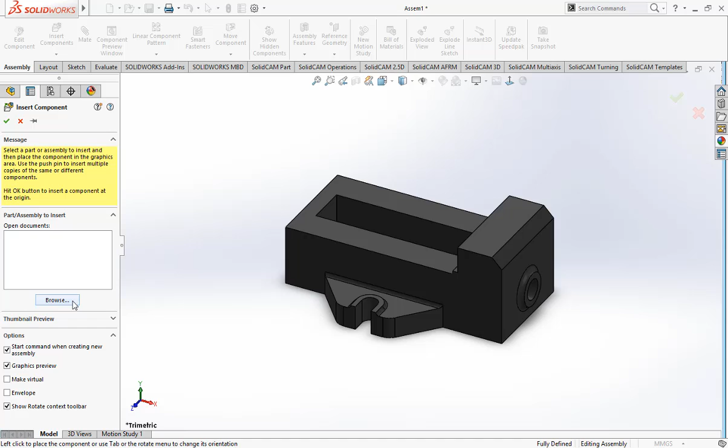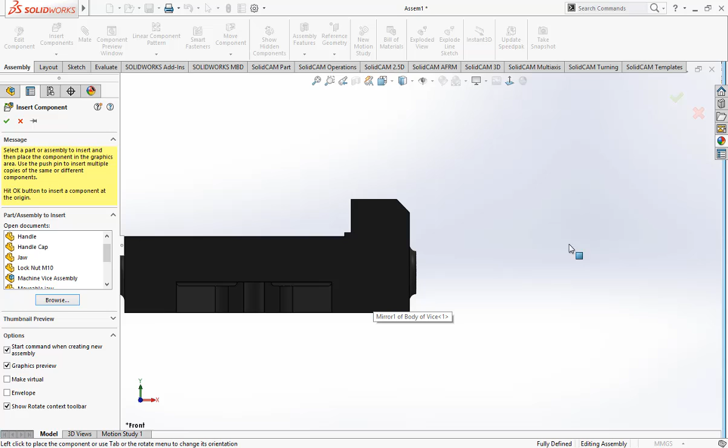Now it is time to import all the files once again, one by one. Sorry, this is the previously used assembly, I need to fix that thing. Okay, just put here.

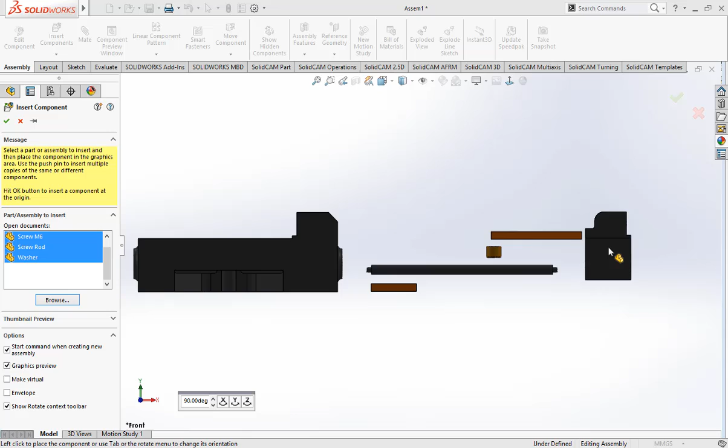Click on first and the last, just leave the assembly as it is. Now place the part one by one so that it will be more easier for us to find out where exactly everything is. That's it, these are all the parts that we required for this assembly.

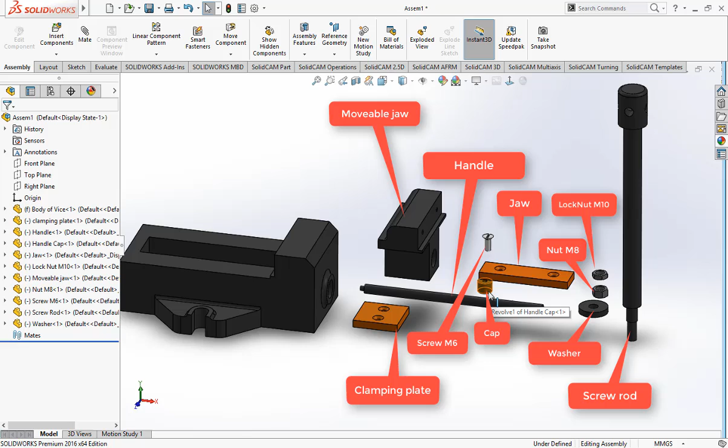As you can see, this is the movable jaw, and this is the handle which we're gonna use to rotate this screw rod. This is the jaw, and this part is called the clamping plate. This is washer, this is nut M8, and this is lock nut M10, and this is the screw M6, and this is the cap which is going to be fitted right at these parts.

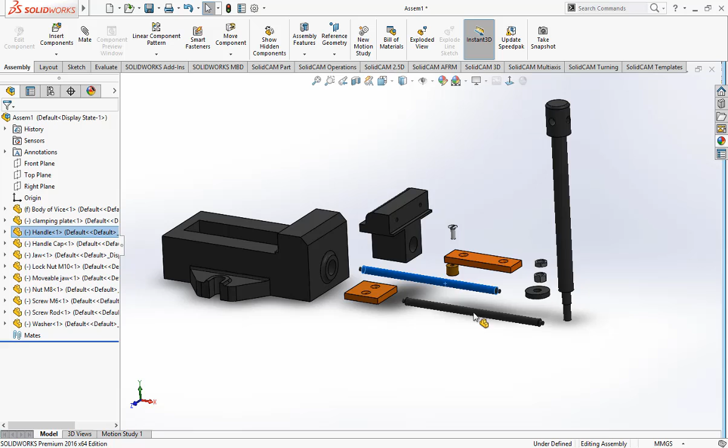First thing first, I'm going to double the amount of some parts, like this handle. I need these two because these are going to be fit in these two holes. So click control and left click and drag it over here. So now these are two parts.

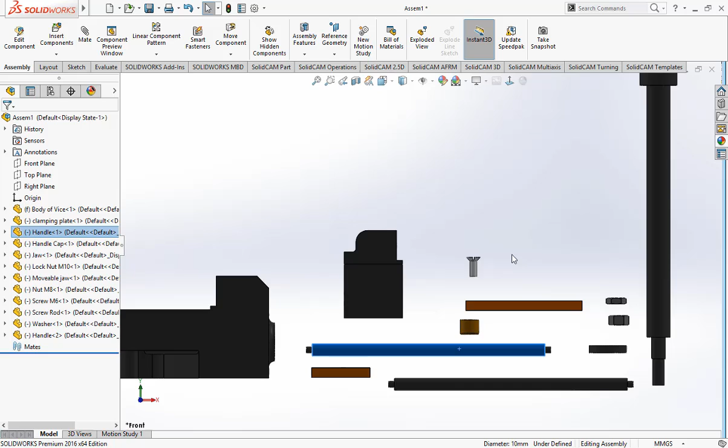Now we need screws, how many? 1, 2, 3, 4, 5, 6. Okay, so one is there, control and left click mouse and drag it. 2, 3, 4, 5, 6.

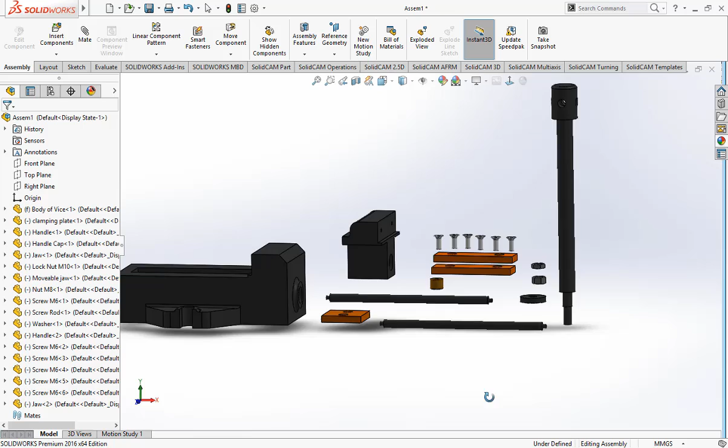So we have 6 screws, and this jaw we need 2 of them. This one is going to be fitted over here, and the other one is going to be fit over here. So again, control left click and drag it. That's it. So these are all the parts that we need to assemble the machine vise.

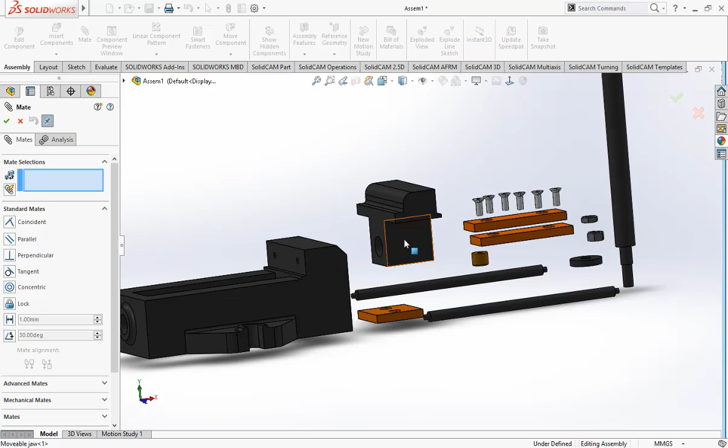For the first thing, we are going to click on the mate over here and click this surface and this surface and make it coincident, click OK. For another mate, click this bottom part and this upper surface and make it coincident, click OK.

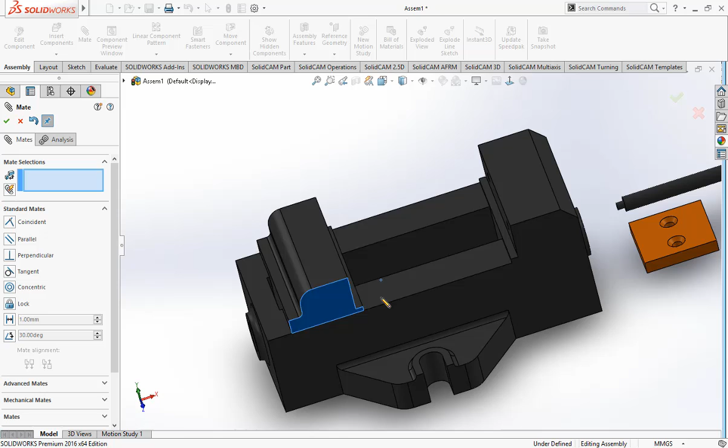Now as you can see, the part is sliding right through the main body. So for this purpose we are going to use the limit mate, so that this movable jaw just slides between this recession or cavity, whatever it is. It has to be moved from this point to this point, not like this. So we will do this.

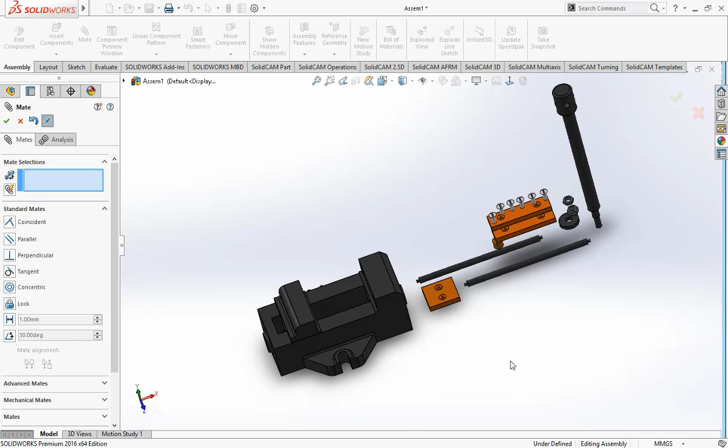Before doing the limit mate, what we're gonna do is I'm going to place this over here. How we're gonna do this? Select the bottom surface and this surface and make it coincident, click OK.

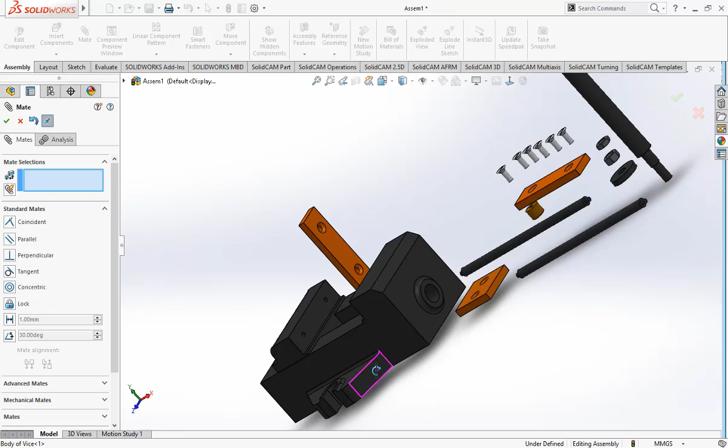As you can see here, the distance or these holes are not right through, not on the center of these 2 points, but offset from the center line. So this is not at equal distance from these 2 distances, so we have to check what goes where. Take the shortest length from the hole and mate it over here and coincident, click OK.

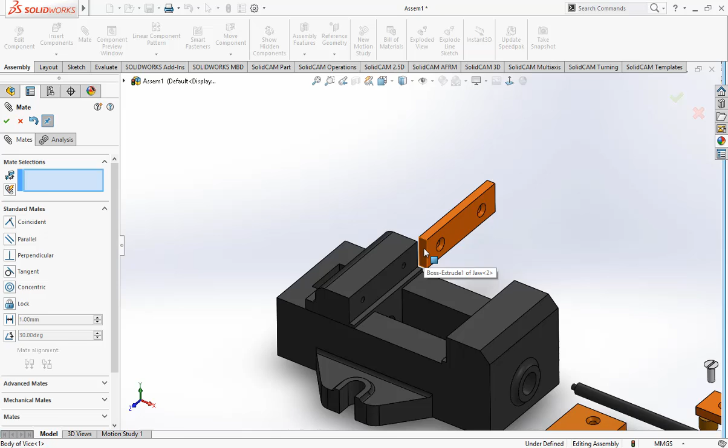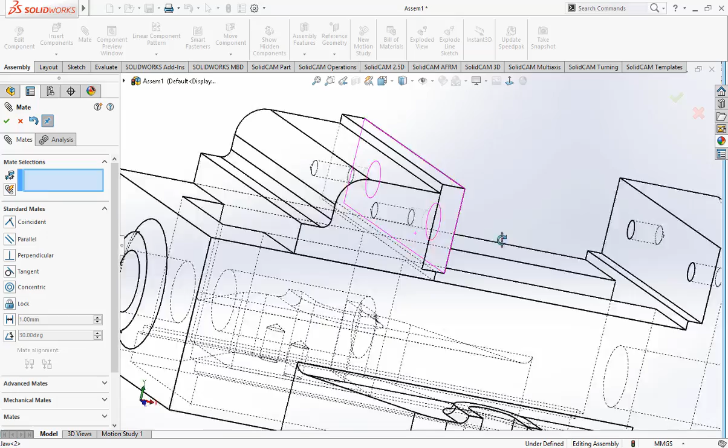Now this surface and this surface, coincident, click OK. Now as you can see, the holes are just concentric with this. Going to change the wireframe structure. As you can see, it is perfectly aligned with the hole. Going back to the solid.

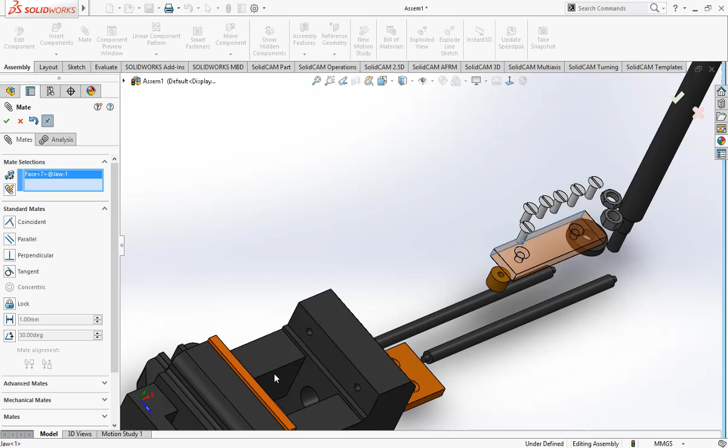So repeat the process, same at this point. Take the shorter distance, click over here, coincident and right. The back face and this, make it coincident and click right. Now this surface and this surface, make it coincident and make it right. So everything is perfect at this moment. Now this is also coincident with the hole.

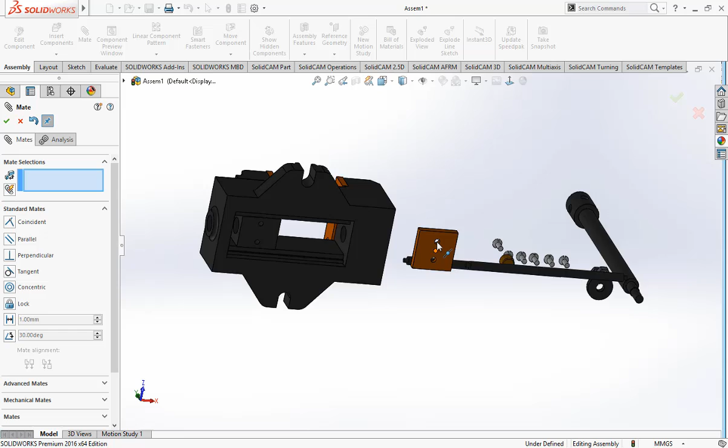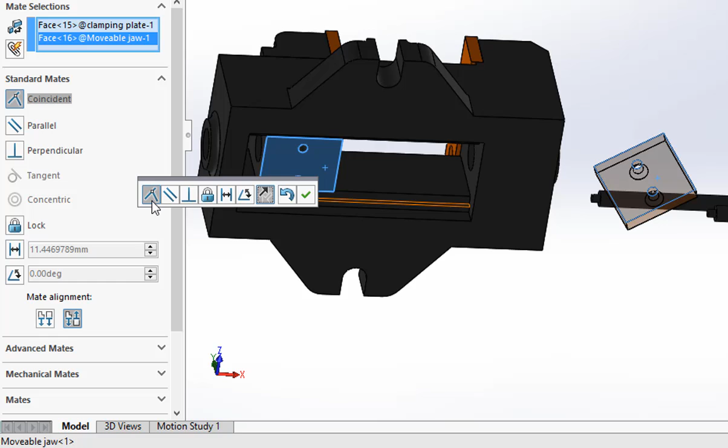Now make it parallel because it is at some angle. To make it parallel, click on this and this, make it coincident, it is already parallel, click OK. As you can see here, it is a bit off.

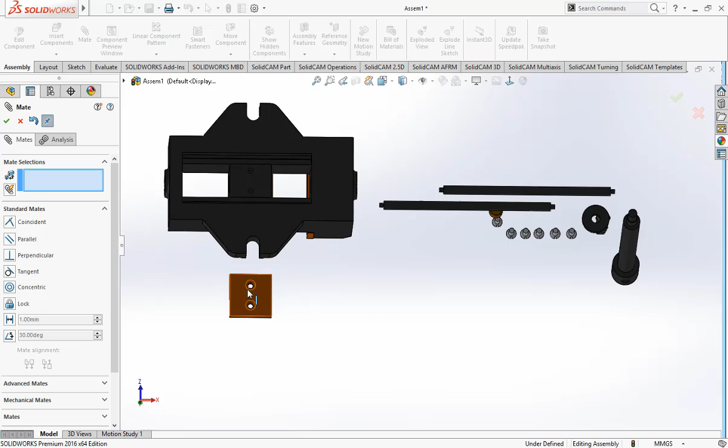Now as I drag over here, it is perfectly aligned with this edge and this edge, but not at the center of these holes. For this purpose, I'm going to make it concentric with the holes, something like this.

Now it is perfectly aligned, not going anywhere. Now it's time to fix with the help of screws.

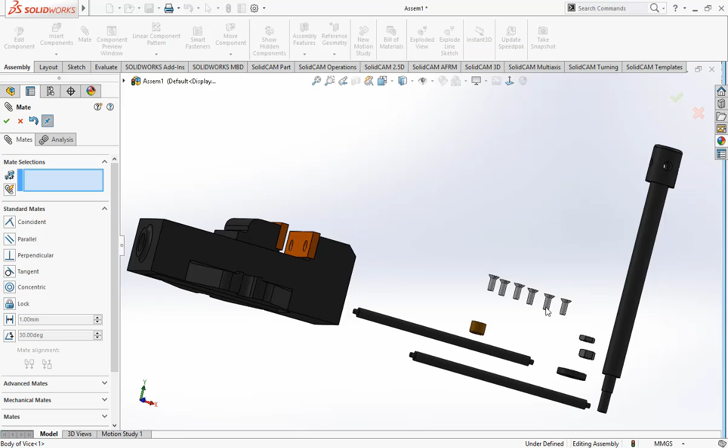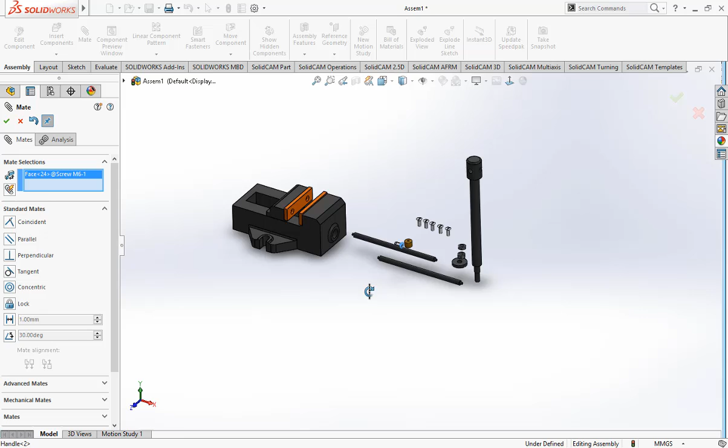Click the cylindrical part of the screw and this hole, make it concentric and click OK. Now it is aligned. Select the tapered or angled surface coincident with this angled surface. Make it coincident and you can see it is perfectly aligned at this surface.

Now repeat this process with all the 6 holes.

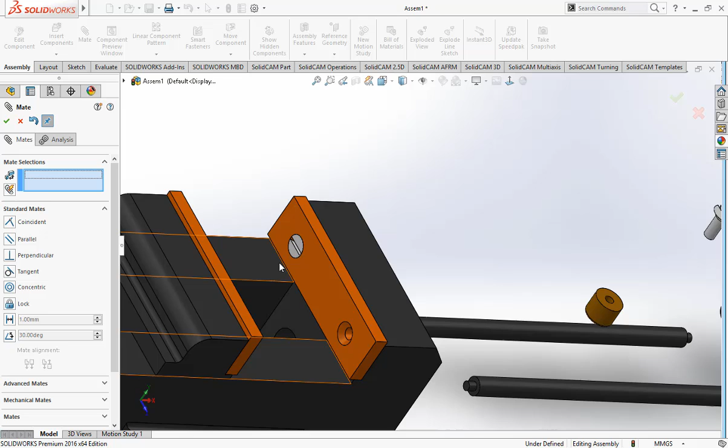This jaw part is fixed with this screw on the body and the sliding part. Now it is time to fix the bottom screws. Select the screws and repeat the process.

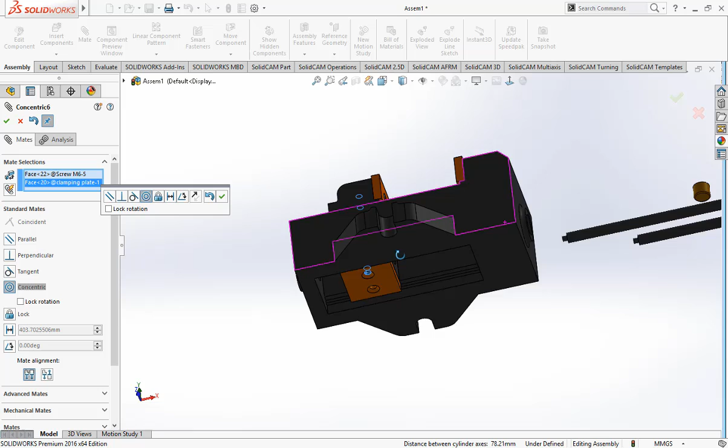As you can see here, the screw is in another direction instead of the downward direction. To make it align with this surface, click on Flip Mate Alignment. Now the screw is downward.

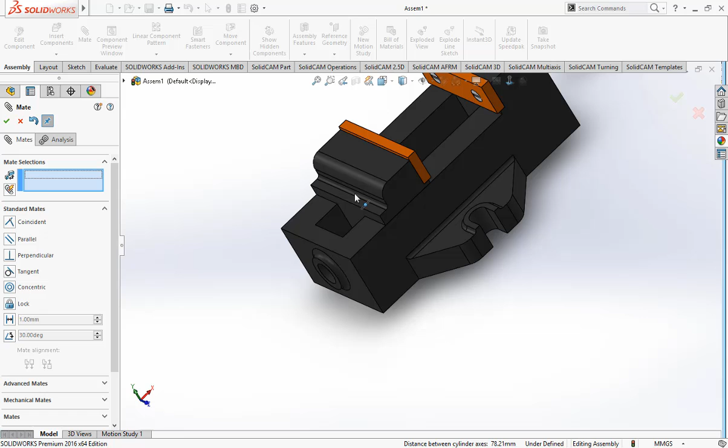As you can see, we are not able to see this part. It doesn't matter, it is there. It's not visible at that moment, but the screw is right inside of it.

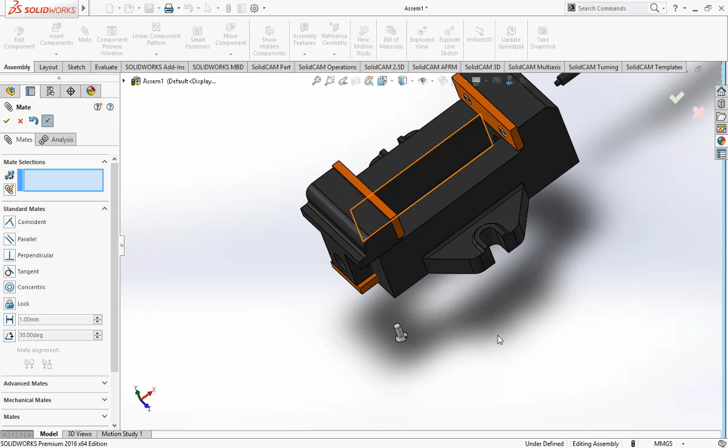Select that contour and align it with this surface. Done. Now for the last screw, drag it over here.

Select the cylindrical part and make it coincident with the surface, turn it upside down, select the tapered part and make it coincident with here.

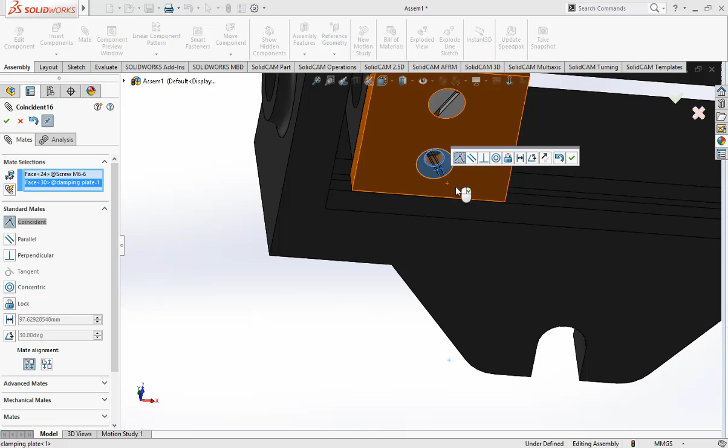So everything is at its place, not exactly, these are still outside of it. Now what we are going to do, it is still sliding through the body or penetrating through the body.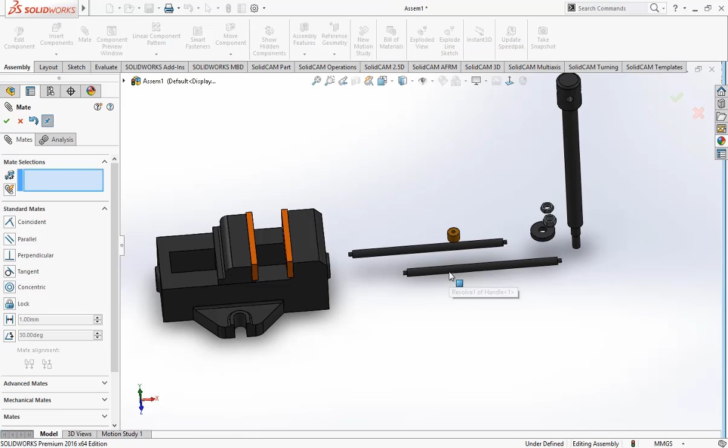Now it's time to align this and this, and click OK. Now the shaft is here.

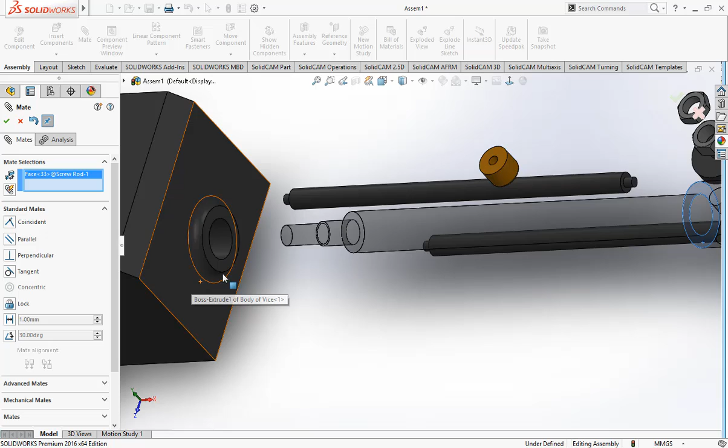Take this surface and make it coincident with this surface, click OK. Now the shaft is through this, but it is still something like this.

Don't worry, now it is time to place the washer. So this is the washer.

Select this surface, now it is already coincident with it, and select the cylindrical part, the outer cylindrical portion, make it concentric and click OK.

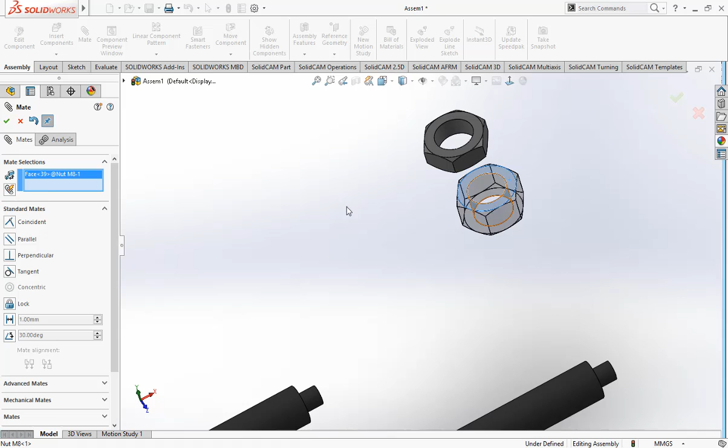Now it is time to align this. Make this surface, or the bottom surface, exactly the bottom surface, and this surface, make it coincident.

Now select the inside of this cylindrical contour and select this, make it concentric and click OK.

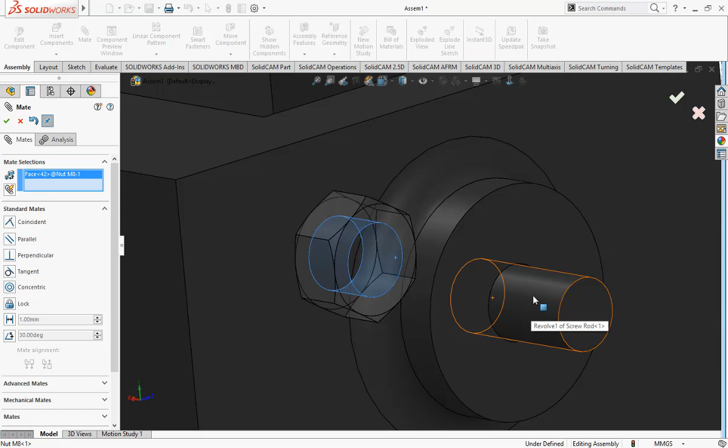It's time for the lock nut. Select the bottom surface and this surface and click OK.

Now select the cylindrical inside and this one, make it concentric and click OK. Now you can see here we are almost done with this process.

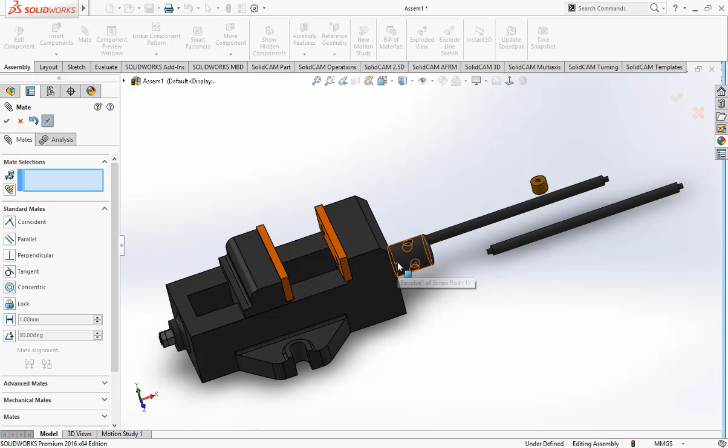Now it is time to put these handles through these holes, but for doing this I have used a small trick. Because if you simply select mate, select this contour and this one, make it concentric and click OK, it goes something like this.

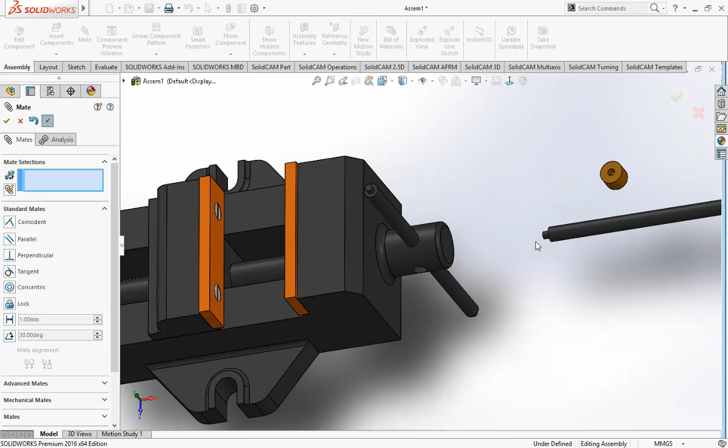At this moment I really don't know how to make it perfectly at the center. So if you guys have any idea how to make this handle right at the center, please write below in the comment section.

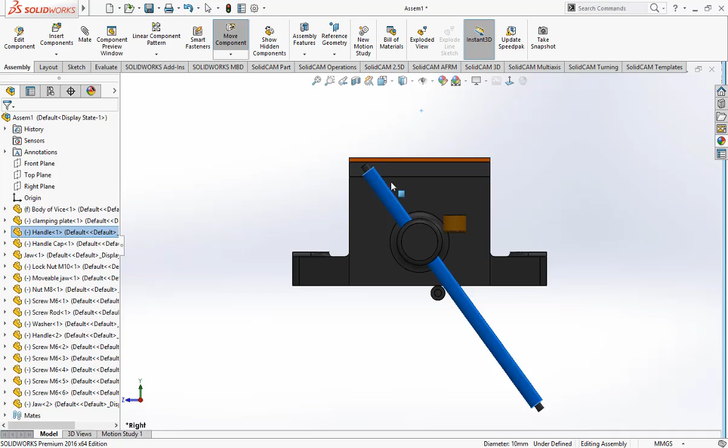But I have figured out something that makes it perfectly at the center. For this purpose, what I did is, first of all, I need to delete this mate.

So for this purpose, on the handle, as you can see here, I have created a sketch.

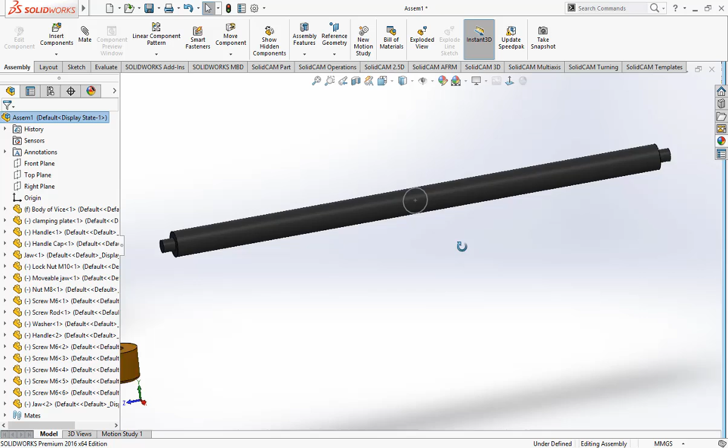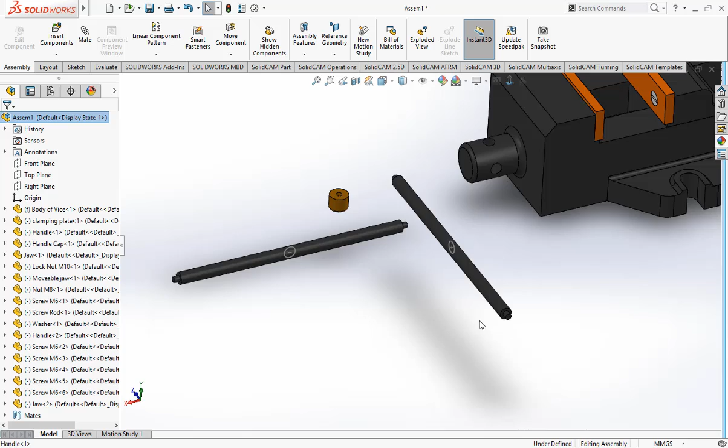This sketch helps me to, as you can see here, the sketch is not along the diameter of the shaft, but opposite to the diameter of the shaft, facing another direction. But the diameter of this circle is the same as the diameter of the shaft, the major diameter you can say, right at the center of this handle.

So for mate purpose, select the mate, select the cylindrical shaft and the inside of it, make it concentric and click OK.

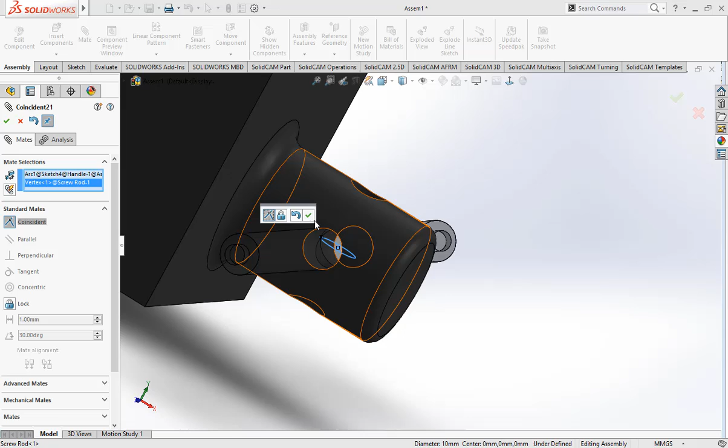Now it is not at the center, it is still fluctuating very unevenly. So what I did is select the circle and select this point, exactly this point, and click OK. Now it is perfectly at the center and will rotate smoothly.

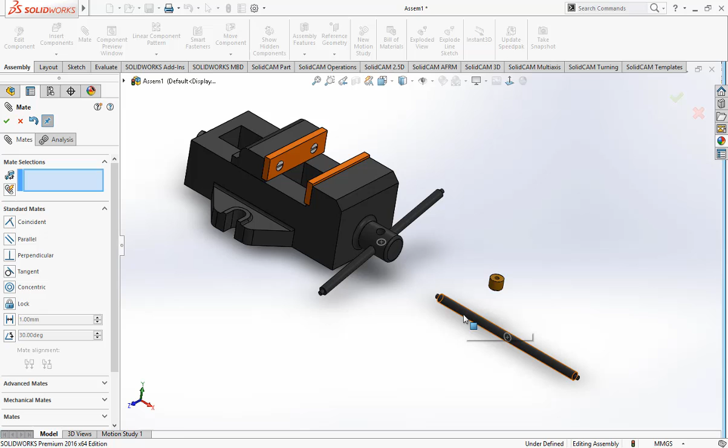So that is why I'm saying that if you have any idea how to do this in another way, you can write in the comment section, because there are lots of different ways we can design this.

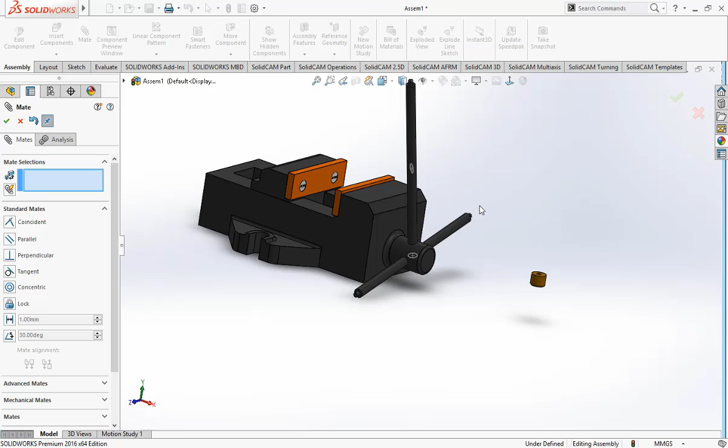Now here is the difficulty that we are not able to see the other mating for this one. So for this purpose I'm going to change it to the wireframe structure again, and select the circle, and this is the point. It will automatically align to this direction.

Now convert it back to the solid path, click on it, click OK. Now I can click on the circle and hide it. Now it is not visible on the screen, but it is there and it works like a good thing.

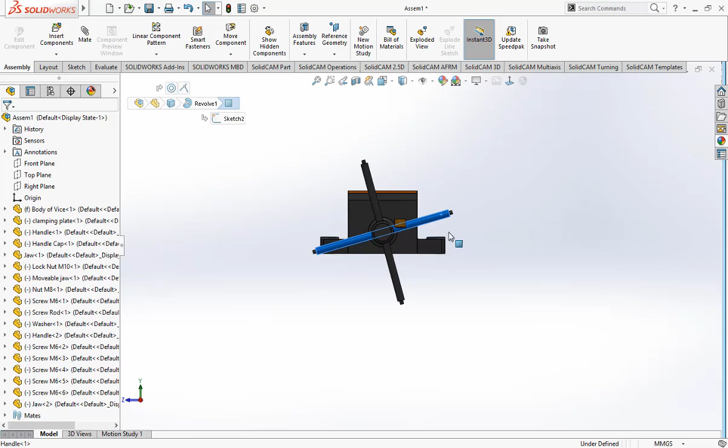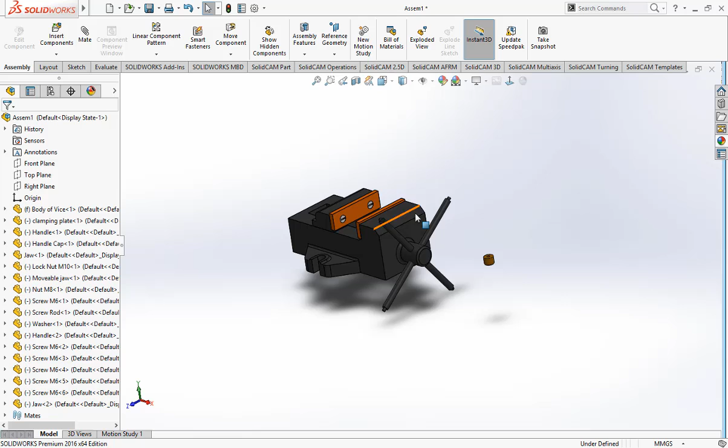Now it is time to make the mate for this cap at this end. So we need 4 of them. 1, 2, 3, 4. Now we need to create copies.

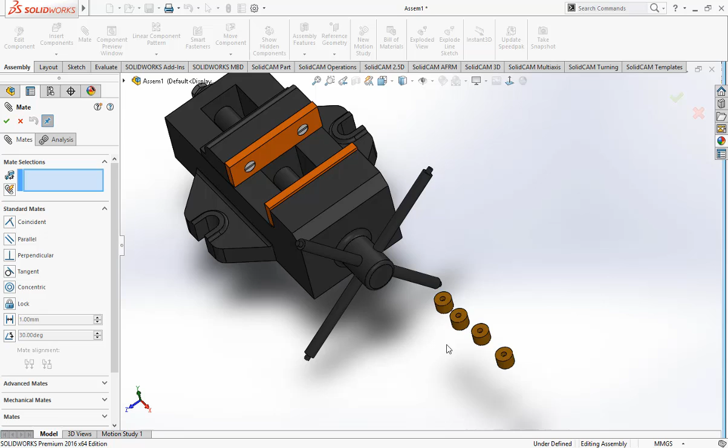Same, repeat, control left click and drag it over here. We have 4 parts of the cap. Now click on mate, make it concentric with this one, flip the direction, click OK.

Drag it over here, select the bottom part and this one, make it coincident and click OK. Now repeat this same process at all these 3 points with this cap.

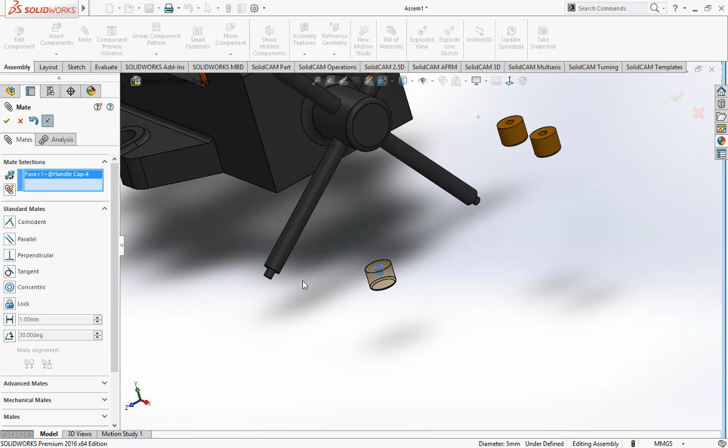It is very interesting. I feel very happy while all doing this thing.

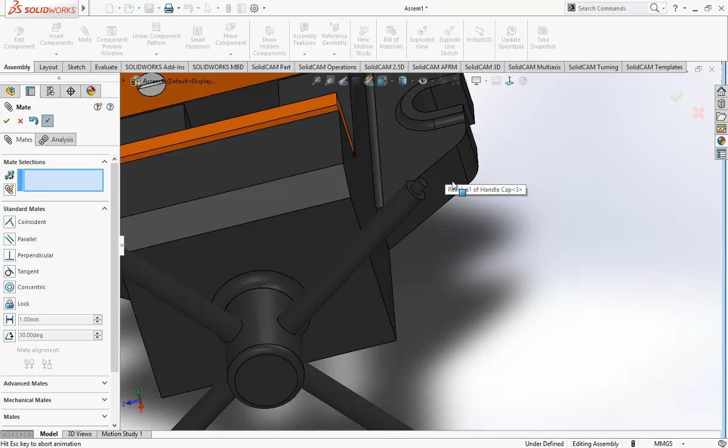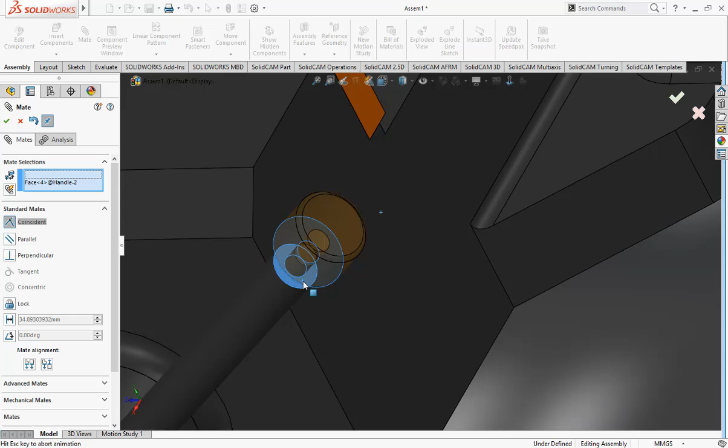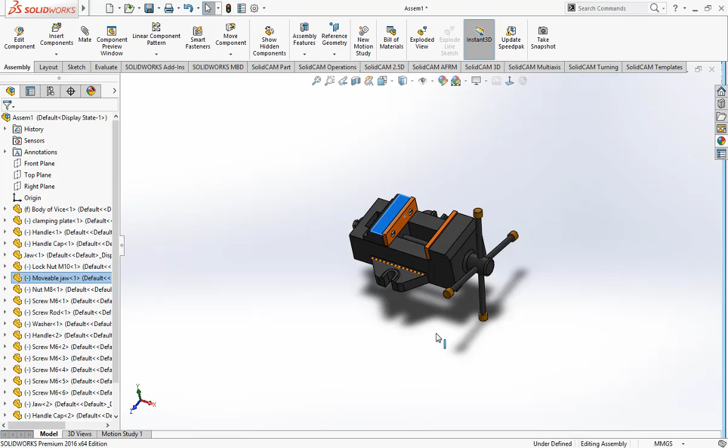For this purpose, I need to click on Mate and go to Advanced Mate. Now click on Distance. At this distance, before putting any value, we need to assign the mate—click on this jaw and this jaw.

Now as you can see, with the default value of 1 mm, there's a gap of 1 mm. If you set this gap to 0, it will automatically close to that point.

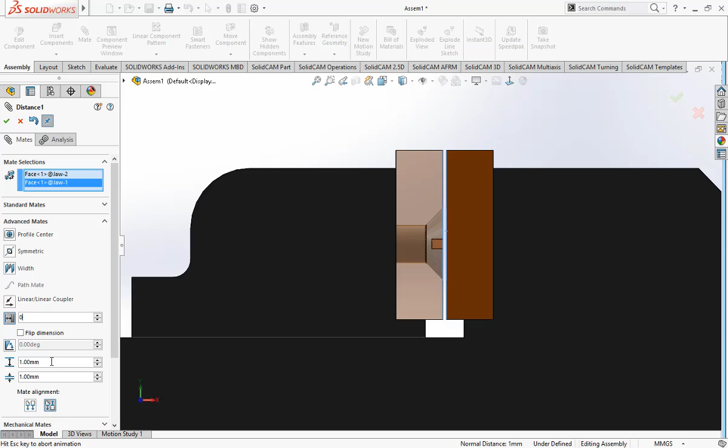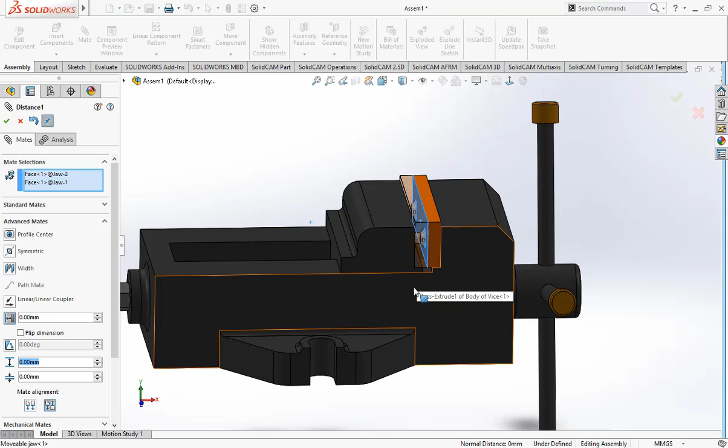Okay, but we need to specify the position by which amount it has to move until this point. So I've done some calculation on how much amount we have to enter at the maximum distance, which is the maximum value or distance it has to move. While designing, I figured out that the distance between this line and this line is 155.

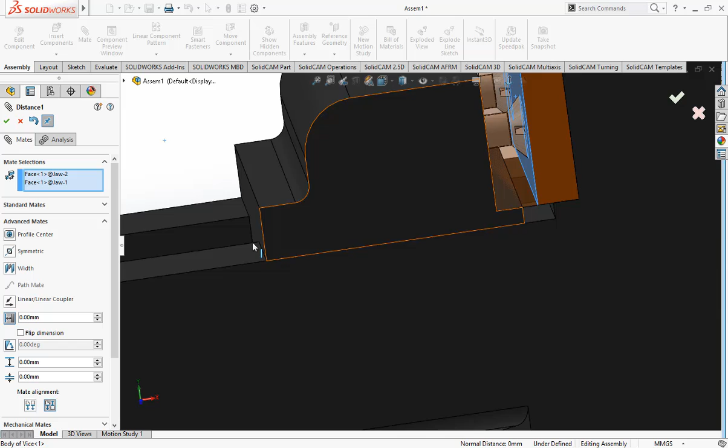155 mm is the length from this point to this point. But this isn't quite right, because the length of this part also has to be considered, which I believe is 50. Yes, so the length of this is 50 mm, so 50 mm has to travel within 155.

So this is the 0 point. If you enter a value of 0 from this point to this, it will go directly to this position, and this surface just crosses at this point.

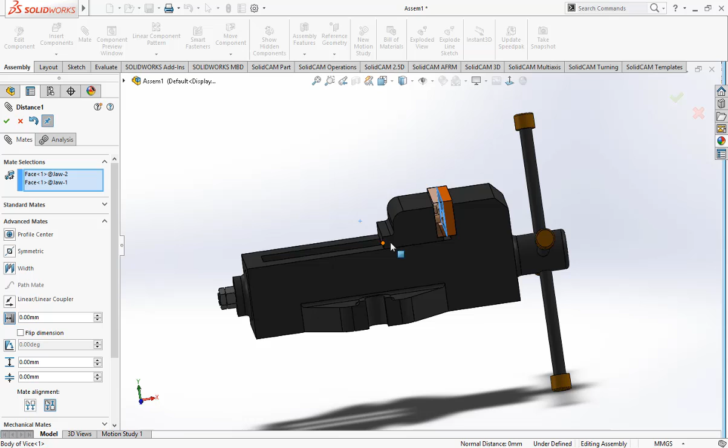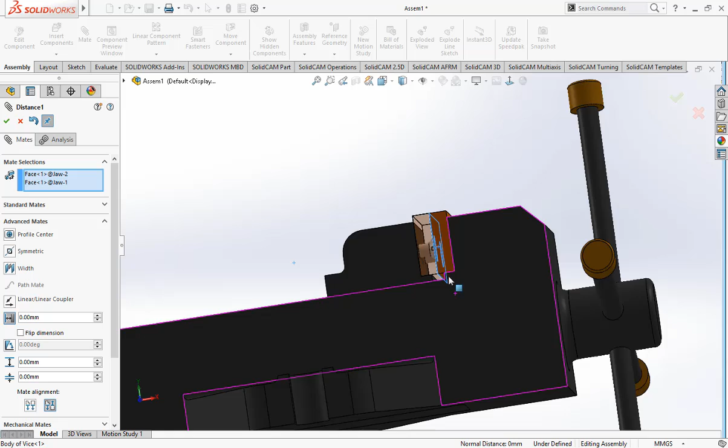So we need to subtract 50 from 155. But we have these two plates attached together, or jaws, and the thickness of each jaw is 8 mm—8 mm plus 8 mm, but there's also some gap. So 155 minus 50 is 105, and upon some hit and trial method, I found out it has to travel 99.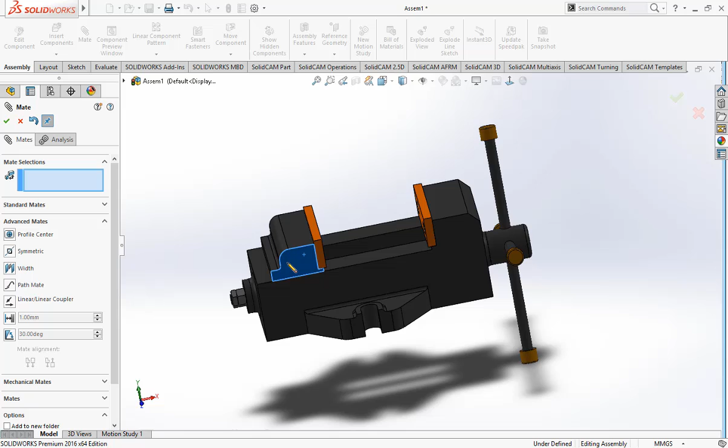Click enter, click OK. Now as you move it, it just stops right there. As you can see, it's moving just between these two points—it starts at 0 and stops at this point at 99. I found this all out by hit and trial. While using the wireframe structure, you can see when I drag it, it just stops at this point.

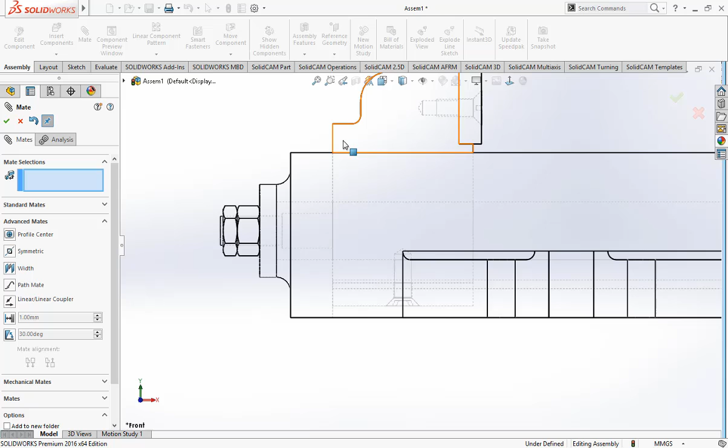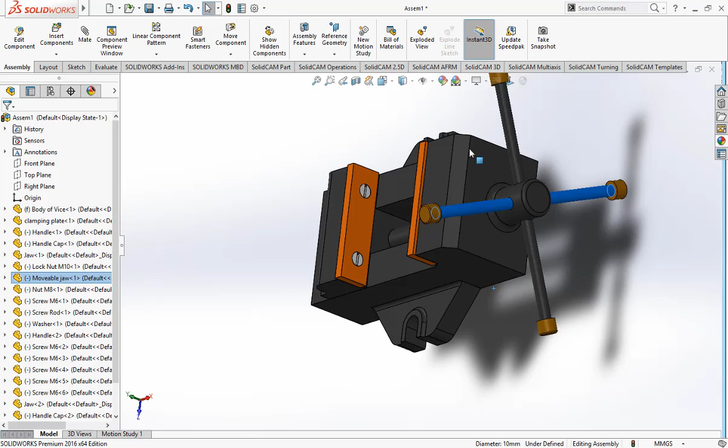Okay, now converting it, click OK. Now it's time to place the screw mate between this shaft and this movable jaw, which means that when I rotate this handle, it rotates the screw rod, which in turn moves the movable jaw back and forth within the range. How are we going to do this?

For this purpose, first we need to find out where the screw rod is. There it is—I'm going to hide it temporarily. Go to Mate, drag down, click on Advanced Mate, select Screw.

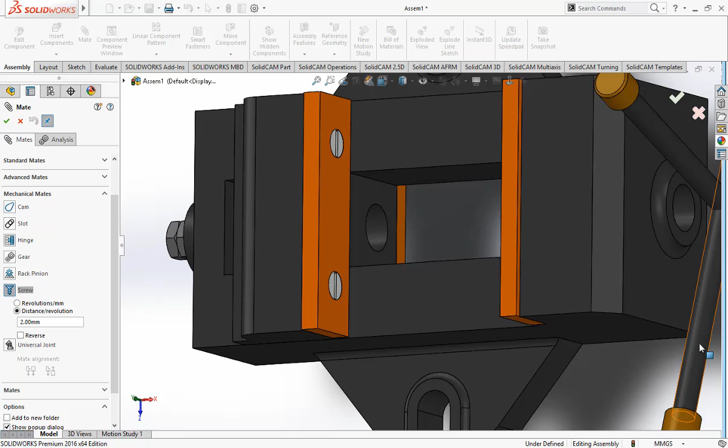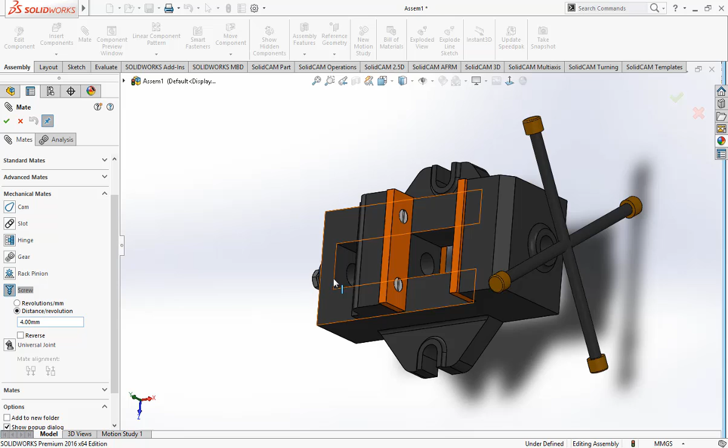Now select distance per revolution, so it has to travel 2 mm per revolution—meaning one revolution of this in turn moves 2 mm of the movable jaw. But to make it faster, I'm going to increase the movable distance value to 4, just for demonstration purposes, but it really depends on the pitch of the screw thread on the screw rod.

So we've entered the distance. Now it's time to click on this and make it visible—show. Now select this one. As you can see, rotation is now visible. Click OK.

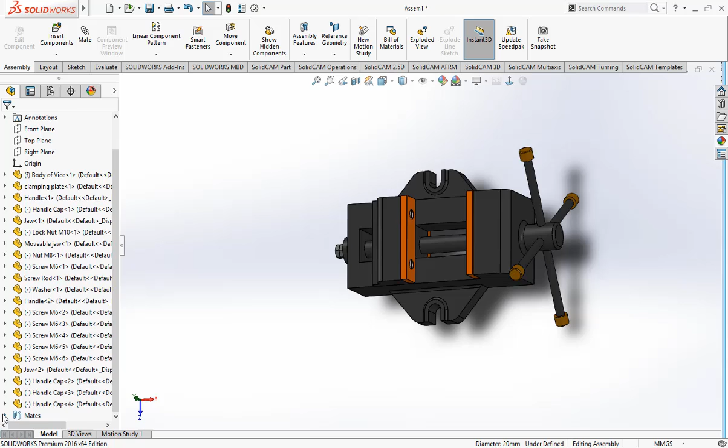And hit enter. Now check if the screw mate is applied—now the screw mate is applied. Now if I rotate, the jaw has to move backward and forward.

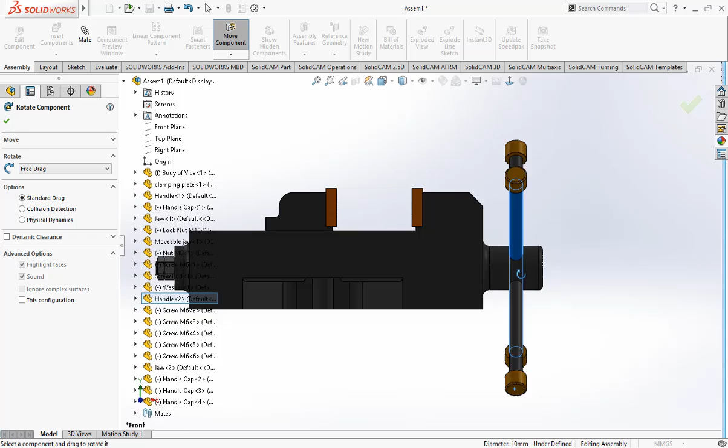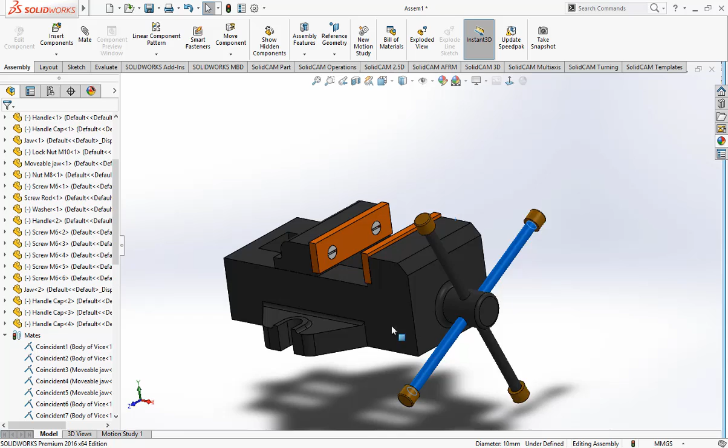Watch and see what happens when I rotate the handle. So this is it—this is how you can see the movement happening. So this is how you can place the screw mate and the limit mate in the machine vise assembly.